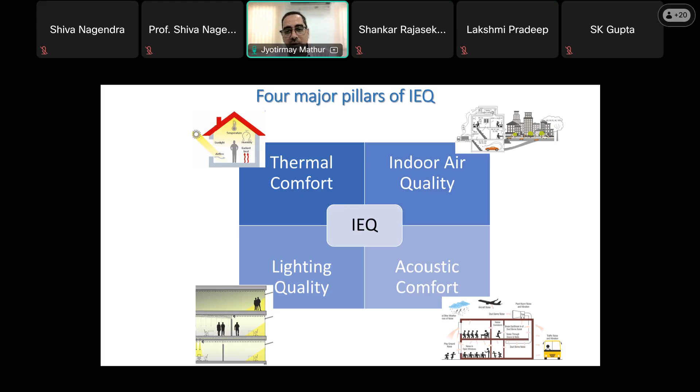So coming to the indoor environment as it is seen as of now, there are four major sections of indoor environment. One, of course, is indoor air quality, which most of you are familiar with and you work day in, day out in this space. But the other three are thermal comfort. We all are familiar with it. We'll see in due course how familiar we are. Then we have lighting, also making a very important part of our indoor environment. Acoustics is also making a very important part of it.

Why these are important, and where the control on these comes from: one is of course the external conditions. External temperature affects the thermal part, external air pollution impacts the air quality part, outdoor noise gives the acoustic part, daylight impacts illumination, and green environment nowadays is becoming quite popular. People take various initiatives to make a building green. Well, the definition of green is changing from scenario to scenario, but yes, there is some impact of that.

Then we have the building envelope impacting the indoor environment, which means typically the construction material. Some of them directly impact the air quality, especially when it comes to release of VOCs and other things. You are familiar with that. Construction practices play a very important role, because if you have leaky windows or a gap between the sill and the window frame, you have not only hot air coming through that, but also pollutants coming through that. You also have facilitation of noise coming in through that, and interiors, of course.

We have building services, where the HVAC system is basically the air conditioning system in simple words, which is supposed to cover many things, but unfortunately, in most cases, it is covering only temperature and humidity. Ideally speaking, the air conditioning definition itself says that the responsibility of the air conditioner is also to control the air quality. But in many cases, we have seen that it is not doing so. It is also supposed to control odor, which is also part of your air quality, but air conditioning systems and their design do not care for it. So building services also have a very major role on your indoor air quality.

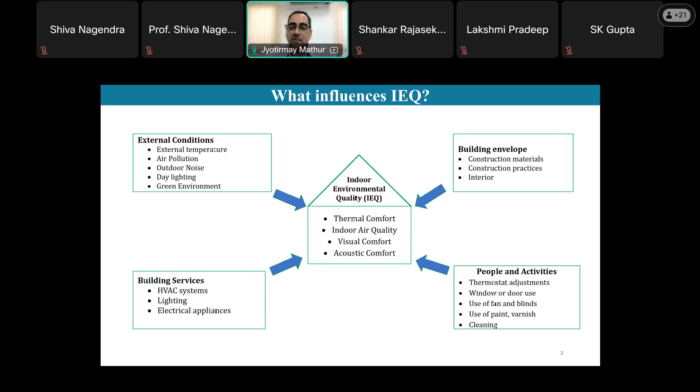So that's also controlling your indoor environment, and the building becomes stuffy, and then you have to run your air conditioner. Use of fans and blinds, use of paint, varnish, cleaning, all these things are important for controlling our environment.

So there's an organization in India, many of you may not be familiar with it, and hence I'm covering this briefly: the Indian Society for Heating, Refrigerating and Air Conditioning Engineers. They realized the importance of this field, indoor environment, and released a position paper. There was a team of about 10, 12 people working in this field, both from academia and practice. So ISHRAE brought out a position paper in 2015, and then all those who were involved sat down to develop a standard, which was released in 2016.

So this was globally the first standard, as was said in the introductory part also. This was globally the first comprehensive indoor environment quality standard, which addressed all the four sections nicely. After the release of that, there was a research project given by ISHRAE. I had the privilege of working closely with Professor Shiva Nagendra. We jointly conducted this project, and our learnings were embedded in the revision of this next version,

which was in 2019. And after that, a third version, and now we are working on the fourth version of it, in which we are discussing, can we include more parameters? For example, electromagnetic radiation. That is also becoming an essential part of our indoor environment, and so on and so forth.

So the structure of this standard is that there are three levels, A, B, and C. In C, we have kept the minimum acceptable requirements for various parameters, for example, CO2, PM2.5, and all those things, which are either legally necessary or they are the minimum requirements in the different rating systems, such as the green building rating system, and so on and so forth.

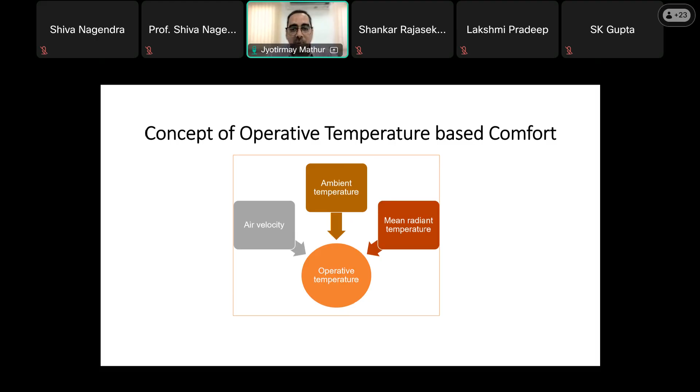Because radiative heat transfer, out of the three modes of heat transfer, is the strongest heat transfer mode. Mathematically, if you remember the equation, it is capital T raised to the power 4. So Kelvin temperature raised to the power 4, and the delta of that is much, much higher as compared to T1 minus T2, which is for conduction and convection. So MRT is to be considered, and air velocity.

Air velocity is something which, especially in India, is very important. In Western countries and European countries, people are not happy if air moves significantly. In India, we are born and brought up in a condition where we love to have a ceiling fan. We love to have an air blast on us for taking away our sweat. So we are tolerant to more air velocity. And the fact is, through many research papers, including a graph like this, which comes from an ISO standard, we validated this for India also.

And we found that, for example, in this graph, you can see there is an intercept of a velocity of 0.8 meters per second on the y-axis to the x-axis, which is at 3 degrees centigrade, which means if at whatever temperature I am comfortable, let's say 25 degrees, I am comfortable with at still air condition. If I increase the air movement in my surrounding and make it 0.8 meter per second, I will be comfortable at 3 degrees higher temperature than what I was earlier. Means 28 degrees. So the 28 degree ambient temperature would give me the same order of thermal comfort with 0.8 meter per second air velocity as a still air with 25 degrees centigrade would.

What it results into is, as a thumb rule, 1 degree rise in my thermostat of air conditioner gives me about 4 to 6% of energy saving. So with this kind of setting only, I'm sitting on a potential of saving about 15% energy, which is tremendous. Okay. And that is why this is not to be neglected definitely when we are talking about Indian context. And that is what is embedded in the ISHRAE IEQ standard also.

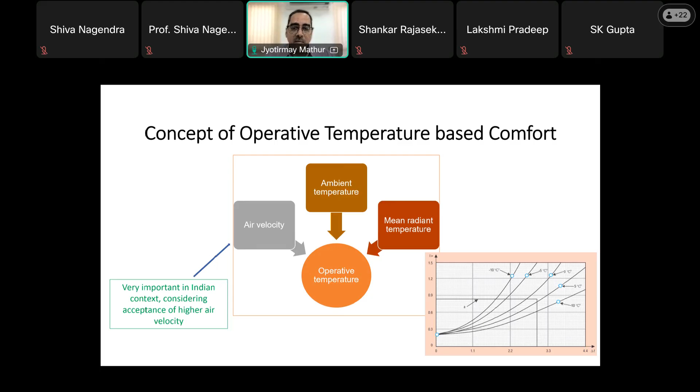So to summarize this slide, we have 3 parameters, and what they make as a combination is called operative temperature. Most of the standards world over are talking about this operative temperature, but this operative temperature becomes more or less same as ambient temperature if my air velocity is not there or not significant, and the surroundings are also at the same temperature as my air. But in Indian context, you don't like to sit close to a glass in summer because that is hot and that disturbs my mean radiant temperature. So in Indian context, we definitely need to look into these 3 parameters.

So from various researches conducted in India on Indian subjects, this is what is summarized. So the temperature conditions in summer in various offices, conference rooms, etc., should be within plus minus 2.5 of 24.5, which typically means 27, and on the lower side it's 22. So 22 and 27, it's a wide range.

And clothing, because we are adapted people. People who are there from IIT Madras, who knows better than them that you wear airy clothes which can breathe in summer because of the possibility of venting out the sweat that your body is getting. So that is what 0.5 clo is. 1 clo means a formal clothing which is not allowing much of airy kind of thing from the clothing. Okay, so the temperature band is specified, a different temperature band for winter and different temperature band for summer.

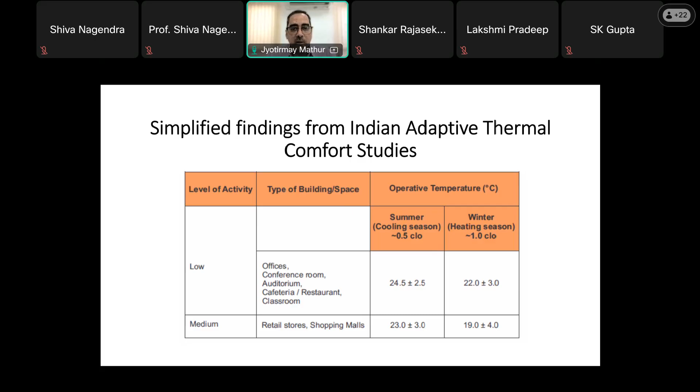But what we also need to know is my thermal comfort also is governed by many other parameters. For example, the operative temperature I talked about. So the operative temperature has to be seen from that table. Relative humidity, we normally have a notion that relative humidity 50-55% is good, but a wide range of 30 to 70% is actually good. Below 30%, of course, the air quality thing comes into, and many of us would have realized this during the COVID when guidelines were issued, that keep your air humid, because when air is humid, the particulate matter does not travel much deeper into the nasal tract, and therefore the possibility of infection getting inside. Also, it results into dryness and all other things. So humidity lower than 30% is not recommended. At the same time, humidity higher than 70% makes people quite unhappy and quite uncomfortable. And therefore, this is the range.

In addition to this, you have limits for warm ceiling, delta T between your room temperature and warm ceiling. You have cool wall, you have cool ceiling and warm ceiling. All these limits are there. Interestingly, there is also a limit on vertical temperature difference. Means at many places, your head is cool, your feet are warm, or the other way around, your feet are cool because air supply is from beneath, from the floor, and your head stays warm. So the guideline is that it should not be more than 4 degrees so as to minimize the thermal stress induced in the body.

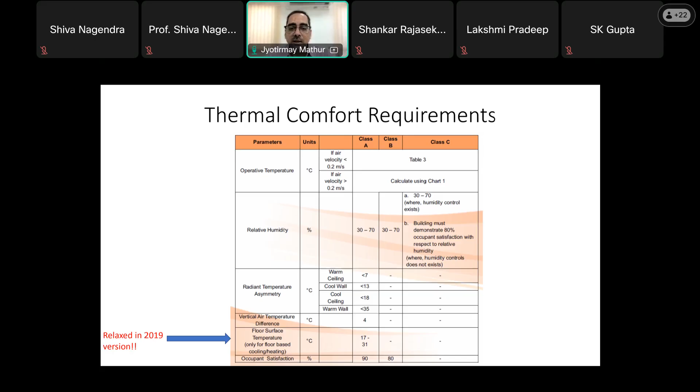Last row is also important, which says occupant satisfaction. In indoor environment, what is seen is sometimes the designers claim that they have a very good environment, but the occupants are not happy with that. So you need to have 80% occupants satisfied. You are supposed to conduct a survey on thermal comfort, and similarly a survey on air quality and acoustic and illumination also. And 80% occupants should be satisfied. Then you are called B class. 90% if they are satisfied, you are called A class.

Coming to the next section, which is air quality, and that is of utmost interest for all of you. And as I was saying, CO2 is, you can say, a pollutant, but people also say often that it's a surrogate pollutant. By sensing the amount of CO2, we sense what is the extent of ventilation. You may not be measuring each of the other parameters, but if you are measuring CO2, you at least get a feeling of how good or bad the ventilation is. So ambient is also always taken as a reference of that.

So PM 2.5, we have 25 as requirement for C and B class both. So in some of the parameters, we do not have a variation between C and B. Some of the parameters are not there in C. So the philosophy was that because C is the minimum requirement, it should not be very cumbersome. Neither should it be very complicated and costly to monitor all those parameters. But all those essential things should be covered. And that's why PM 2.5, PM10, CO, CO2, and TVOC.

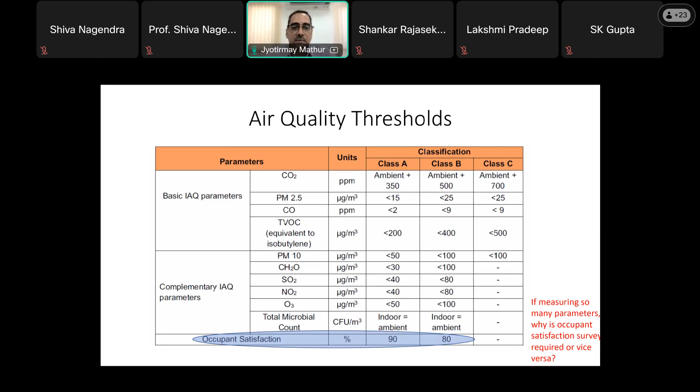These are written. If TVOC is higher than the prescribed limit, then a further elaboration of TVOC is required. And that is what is mentioned in this. Because if the threshold is 500 and I am having 600 or 700, then definitely there is something wrong and I should get into the granularity of it. Each TVOC is not as harmful, and therefore I should really go and check if the harmful VOC, not TVOC, is there beyond threshold limit or not. And every VOC has a different threshold limit. So in fact, Dr. Shankar Rajasekaran was very instrumental in developing these tables, and we heavily bank on him in the next version also.

Well, for visual comfort, again, we normally have a perception that lux level is required. For example, if I have to check illumination on my table is good or bad, I would bring a lux meter, which is lumens per square meter. I measure the lux. If it is between 300 to 500, I'll say it is good. But what the standard says is lux level alone is not important. It brings the concept of quality of light. The 6 boxes that you see on the top left-hand side are same illumination level, means same lux level, but a different color of light.

And you would have seen in restaurants, in hotels and all other places that they like to use a typical shade of light. Why so? Our body responds to different colors of light in a different manner. There is a secretion of different hormones and other things in our body as per the conditions of light. And that is why early in the morning, when the color of light is yellow, we feel very energetic. And as we move towards the night, the preferred color of light changes to pink and so on. So this is in very short the concept of EML, which is called equivalent melanopic lux. So lux is not sufficient. It has to be multiplied with a number depending upon the color of light, which is the quality of light.

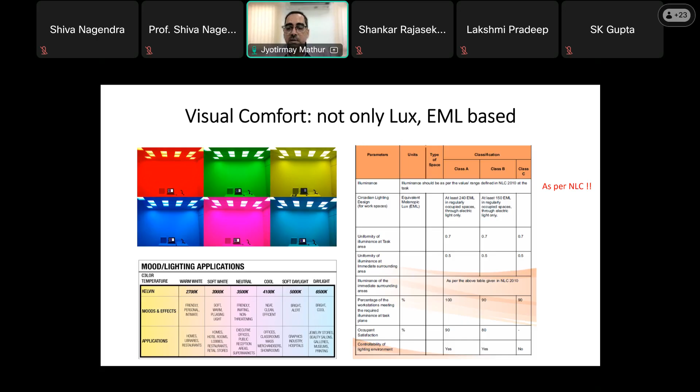Okay. And then we have, of course, the percent of workstations. So in A class buildings, 100% of the workstations should meet that requirement. In B class and C class, we have a 90% requirement. And of course, the occupant satisfaction has to be 80% and 90%.

Okay. So the fourth section, which is acoustics, and I'll quickly cover this because I have to cover the findings also. Approach to the acoustic comfort section. So in the acoustic comfort section, there are three things. One is the noise level limits, because if you have a noisy background, typically created by either the air conditioner or other devices, or there is a humming sound coming from lights, that should be under limit. Reverberation time: your surroundings have a property of absorbing noise, and that is to be under control. Otherwise, you get an echo and other things.

And third is the speech transmission index. Speech transmission index is something which quantifies deterioration in the quality of sound when in the same room I am speaking and you are listening. What quality of the sound signals I released are reaching you. That is what is the speech transmission index. And in some cases, we have seen that it's difficult to listen to people very clearly. And that is because of the speech transmission index of that surrounding.

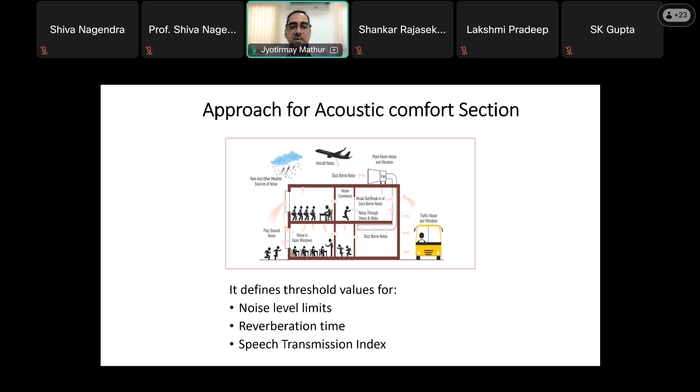So quickly, there is an elaborate table which specifies different kinds of places, because in each type of place you would have a different threshold limit or permissible limit for speech distortion or allowable background noise. For example, if you are in a classroom, you would not like to have a significant speech loss, and therefore a high speech transmission index would be required. The background noise should also be very low, and therefore the noise criteria value would also be low. So that is the fourth pillar of indoor environment quality. And if you have done really well in all four pillars, you have good indoor environment quality.

Nowadays, globally, there are efforts, and we are also trying to have the same in the next version of the ISHRAE IEQ standard: how can we have a comprehensive indicator merging all four sections? And there are many schools of thought. One is to have a weighted average of all four parameters. And within each section, you have, suppose, 5 parameters. Depending upon the health risk posed by any particular pollutant, you assign a different weightage to that. But saying is easy; it's very difficult to assign a weightage scientifically to these things. And that is the challenge taken up by many research groups the world over. And I would be happy if any or many of you present right now take this up as well.

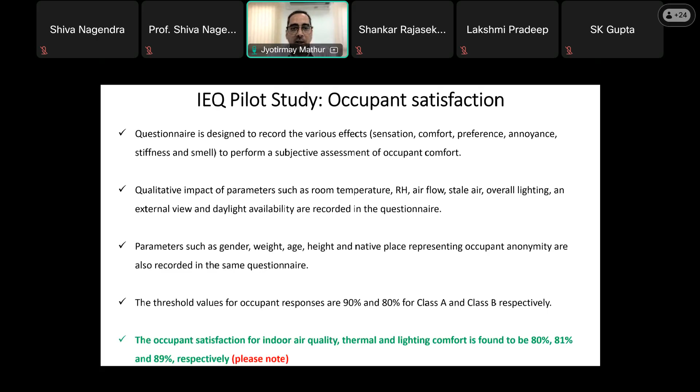So a challenge with us was, in the first version of the project, are the levels achievable? We developed the standard using literature, but are these achievable? Has anybody tried achieving these in the field? So what we did was we conducted a lot of pilot studies in many buildings in Jaipur, and Professor Shiva Nagendra conducted studies for many buildings in Chennai. And what we found was that this is what was happening in Jaipur.

And that is where my duty is to caution anybody who gets into the occupant satisfaction survey, whether it is for air quality or any other thing. The conclusion is we cannot 100% rely on the occupant satisfaction. It has to be substantiated with the measurement. That is what our finding was.

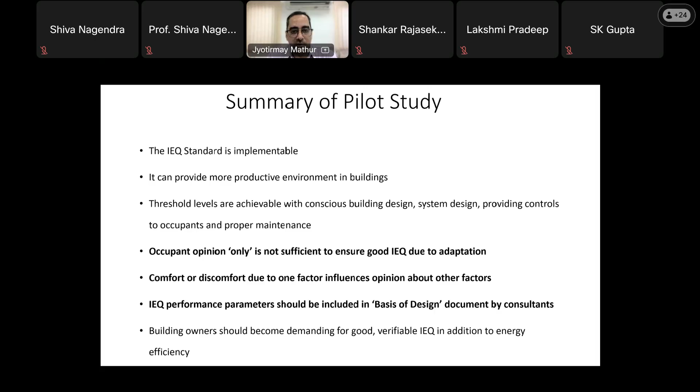And sometimes people complained later on when we went deeper into the investigation and another questionnaire, people realized that yes, because the ventilation was poor, it is also causing some discomfort to us, and they opined that they are not comfortable. So there is a correlation between the temperature and perception about CO2. And that is what is also to be investigated deeper.

So we are talking about indoor environment quality, whether we are talking about one pillar of that or all the four pillars of that. Why is it important? The hypothesis is that because of indoor environment quality, our wellness is improved. And when our wellness is improved, our productivity is also improved. Whether we are a student, whether we are an office person, or any other place. So this is the hypothesis.

So we actually tried to challenge this hypothesis: is it really what is happening? Has somebody tried to cross-check, or is it just a hypothesis and we accept that hypothesis? Well, interestingly, I came across one paper from Harvard Business Review, and that has become my motivation for taking this further, which says that there are many anti-productivity factors in a building.

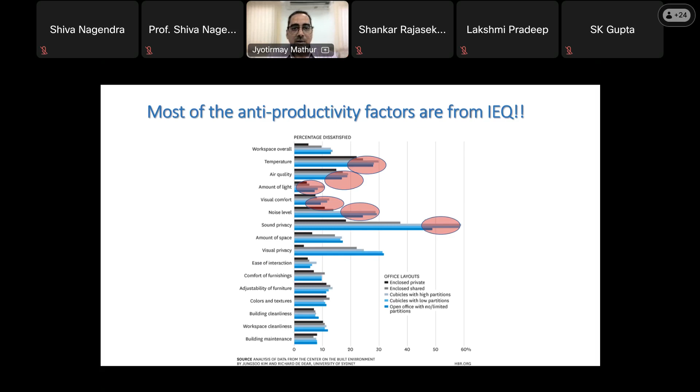Sound privacy is, of course, the highest. Temperature, air, and noise there. And light, productivity is least affected by light because of the adaptiveness of eye, as I said. But in the long run, that is also not a good thing. So getting motivated by this, we really went deeper into this.

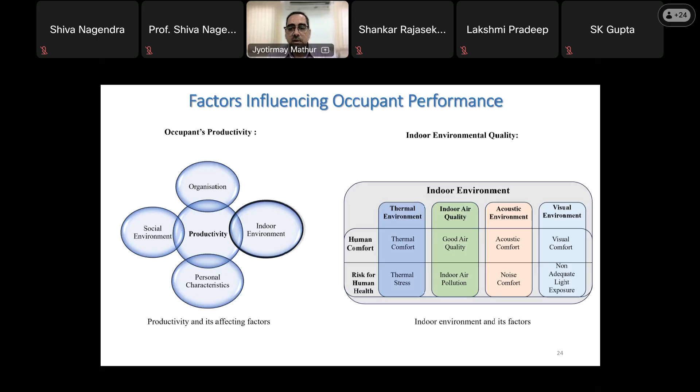So productivity of a person, first of all, what we found, is a function of organizational culture, a function of the social environment a person is from, and personal characteristics. Somebody is very productive, somebody may not be that productive. And of course, indoor environment. So that is what was coming out from literature. I'll move further on that.

So we specifically analyzed the impact of thermal environment on cognitive function and the productivity of people, occupant performance. I expect some of you to take up this challenge and investigate what happens to the occupant performance with respect to indoor air quality, especially CO2. In fact, one of the students with me is working on the impact of CO2 because ventilation is also a challenge. And we spend significant amount of energy for having high ventilation.

If you have higher ventilation rate, the heat ingress in your building is also high and there is an energy penalty. So what is the correlation? What is the optimal? That is what is to be seen. So we have air temperature, relative humidity, airspeed, radiant temperature, controlling my thermal environment. As I said, clothing insulation and metabolic activity are your personal attributes. So that is personal choice. But there are 4 basic things which are to be looked into.

One is the attention, the span of attention, how deep is the attention, and so on and so forth. Memory is also a cognitive function which affects my performance. So short-term memory, long-term memory, free recall, verbal memory, all those things are there. Perception, how is my perception? There are 4 kinds of perceptions. And then we have high order skills. So some reasoning functions, some planning functions, some problem solving, and all these things.

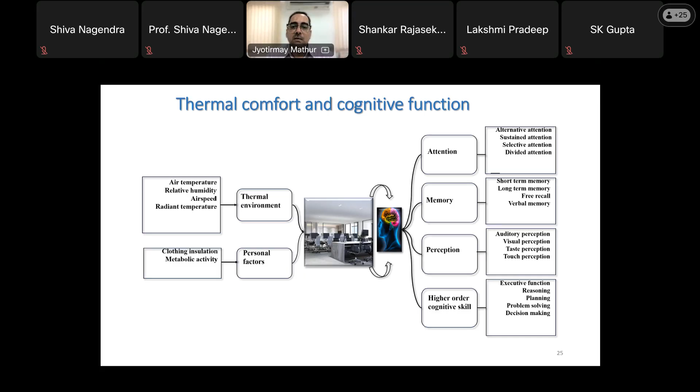And there are certain tests. So there are international protocols for conducting these analysis, and there are questionnaires. So what we did was we had in different settings, this is just one example. We conducted these in classrooms also, we conducted these in office settings also, research labs also, and we found that, so this is the glimpse of the variety of conditions that we had during this analysis. So all those tests, a series of tests actually, I'll come to that slide, was conducted.

So there were subjects in winter, we had 96 subjects. Summer, we had 48 subjects. You can say that this number of subjects is less, but I'll tell you later why it is so difficult. Even this number is, as I'm saying, till this research was conducted, this number was world's highest. Most of the papers that we were finding had 20, 25, 30, at max 40 subjects.

Okay, so we had air temperature ranging from 15 to 24 in winter, 24 to 33 in summer. In winters, definitely air velocity doesn't make sense, but in summers, we varied the air velocity from 0.2 to 1.2 meters per second, which is the agreeable limit normally. After that, the draft makes you uncomfortable. So the total number of samples we collected was 384 and 576.

And we conducted tests on thermal sensation, thermal comfort, mood disturbance, willingness, well-being, and all that. So there is a series of neurobehavioral tests which are accepted internationally. And some of these tests are also conducted for astronauts who are sent by NASA and other similar organizations. So we actually found those protocols and conducted those tests. This is how the test is conducted.

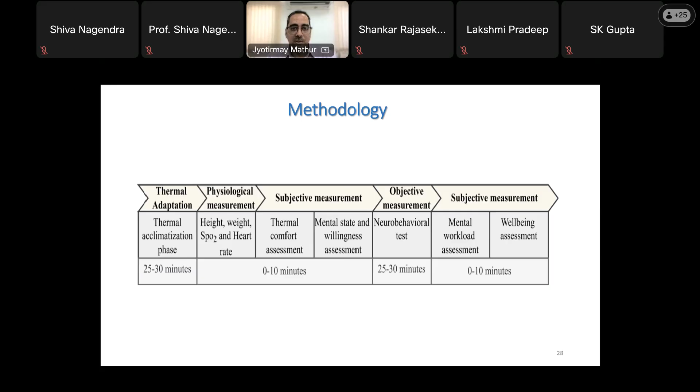And that is why I come back to the fact that in most of the publications, you would find that such tests are conducted on 15, 20, 30, 40 at max subjects, because even we needed to spend a lot of money for keeping them motivated. And we needed to ensure that they don't memorize the test, and so on and so forth.

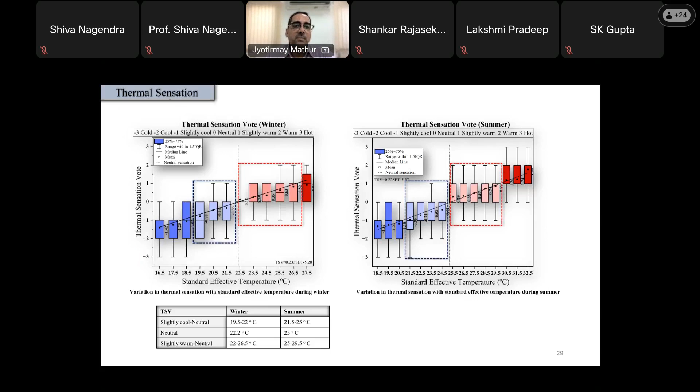So this is about thermal sensation. Thermal sensation, obviously, in winters, we had relatively lower temperature at which they were comfortable, summers a little higher temperature at which they were comfortable. But interesting is that in thermal comfort, winters, we also expect that they would be really fine at a slightly cool environment, but it was not so.

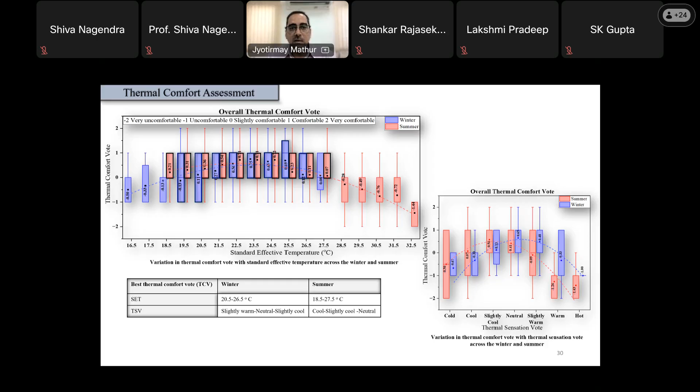You can see the graph at the bottom and the curve which is there. It is peaking at a higher temperature as compared to the peaking of summer temperature. Means people like to be in a slightly chilly environment in summer and slightly warm environment in winters, against the normal notion that we will be okay at a lower temperature. This is what we found.

More interestingly, this is also what was our finding, that the mood state is also a function of temperature. So in the mood state, what we found was that in summer, the mood disturbance was minimum when the setting was slightly cool or neutral. When they were feeling slightly warm, the mood disturbance started increasing. When they were feeling slightly cold or cool, the mood disturbance also started increasing.

Reverse was the situation in winters. When they were feeling slightly warm or neutral, the mood disturbance was decreasing. In fact, with slightly warm condition, the mood disturbance was minimal. What it indicates is, unlike the hypothesis of thermal comfort, they always tend to recommend that when people are neutral, keep that temperature setting.

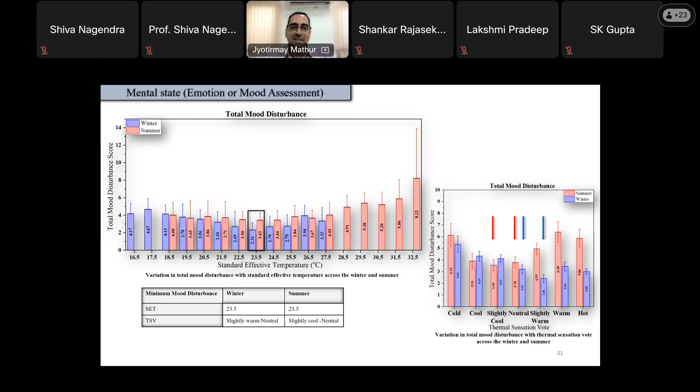But what our mood disturbance study says is that when they are feeling slightly warm in winter, keep that temperature setting. When they are feeling slightly cold in summer, keep that temperature setting. And that is what was against the prevailing hypothesis.

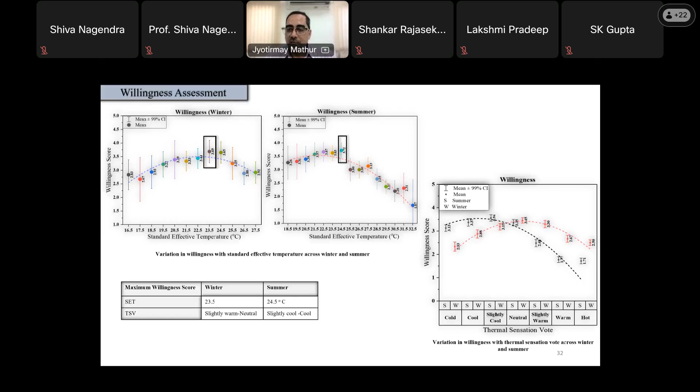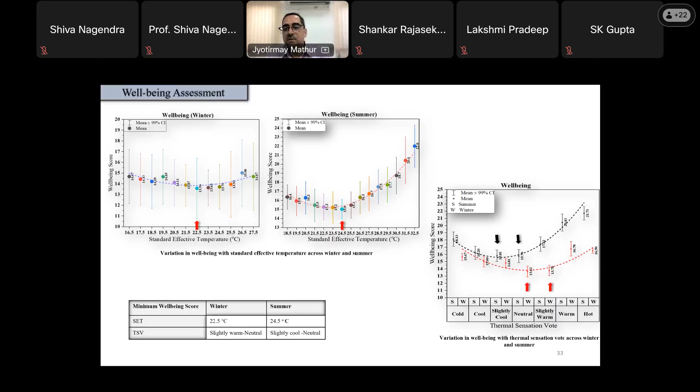Well-being, there are a lot of checks for well-being, for example, dryness, giddiness, eyes burning, and all those things. And again, the well-being assessment was also revealing similar situations in summer and in winter. In summer, you can see that again, the same thing, the well-being was better if the person was slightly cool or neutral. In winters, the wellness was better if the person was neutral or slightly warm.

So we also had, out of the quantitative assessment, the assessment of overall performance of persons. And that is what is important. We expect our students to perform well. We expect our researchers to perform well. So what kind of temperature settings would make them work best?

Because if you remember in JEE, one question right or wrong makes it or breaks it. Okay, so therefore there is a lot of impact, even your grades change. For those who are students, your grades change by 3 marks or 5 marks, whatever be the scene. And therefore, what we found again was that the performance of all these students and officials was also high when the environment was neutral to slightly cold in summer and neutral to slightly warm in winter.

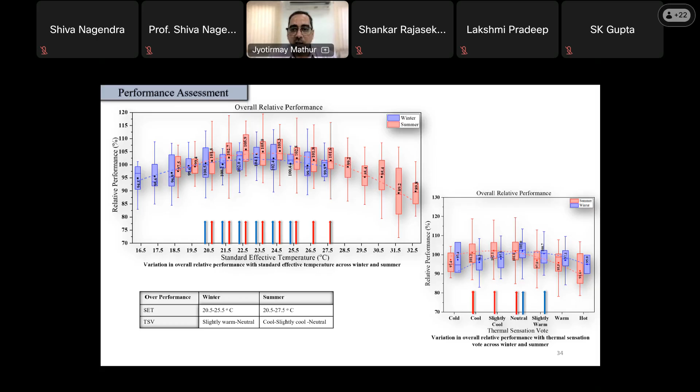Then the order of reduction in performance, you can see on the larger graph that the order of reduction was as high as 10%. Of course, the bandwidth was high, but on an average, over a temperature difference of 3 degrees from a very preferred temperature towards the non-acceptable limits, the performance decreased by 10%. And that is only because of temperature conditions, mind it. We have other parameters also that would affect your productivity, typically the lighting, the air quality, sound, and all.

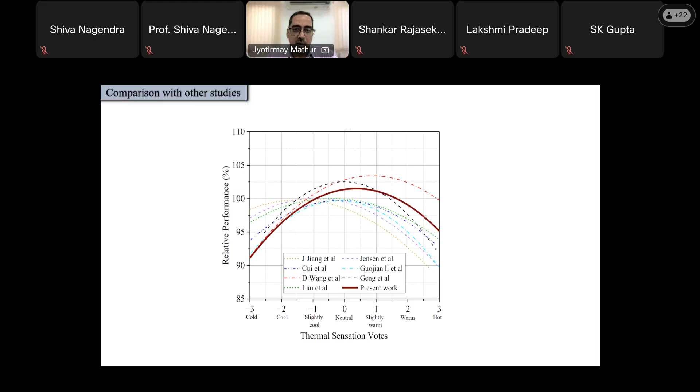So we just cross-checked how our findings were with international studies, and we found that the trends are pretty much similar in other studies. But more importantly, what I want to sensitize you about, maybe towards the end of my talk today, 10% is the productivity loss that we have seen in the graph, and that is only because of temperature and humidity, of course. If I combine the productivity loss due to lighting, due to bad air, improper ventilation, and acoustic disturbance, background noise, and illumination, this will be much higher than 10%.

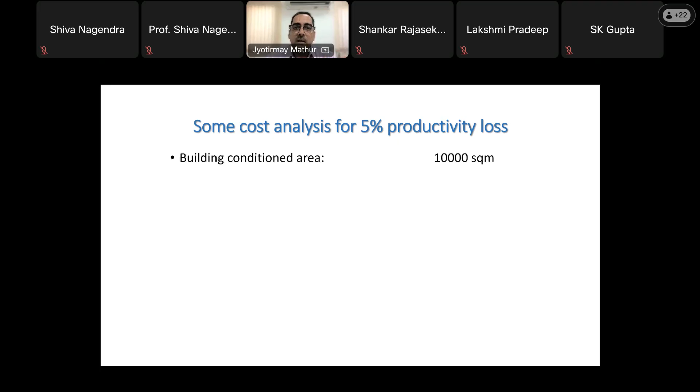I am taking a very conservative 5% productivity loss, and let us evaluate how much it is. Suppose I take an air-conditioned building of 10,000 square meters, which is typically 1 lakh square feet. A construction cost of 3,000 per square foot gives me a cost of 30 crores for this building. EPI is the energy performance index. Energy performance index is the electricity units you consume per square meter per year in any building. And 100, let me tell you, from the Bureau of Energy Efficiency benchmarks, is an efficient building. So this is an efficient building.

The cost of energy, if I take 10 rupees per unit, the electricity bill it pays is 1 crore per year. This is about the energy. The cost of electricity over the lifetime of a building, 40 years life, is 40 crores. If I take about 10 square meters per person, which typically is there in many IT offices, maybe even less area, I would house about 1,000 persons in this building.

Every person on an average getting 10 lakh rupees per year as a salary, my salary bill is 100 crores in a year. So the cost of energy is nothing as compared to the salary bill. The salary bill is much higher as compared to the cost of energy. And the building cost also is much lower as compared to my annual salary.

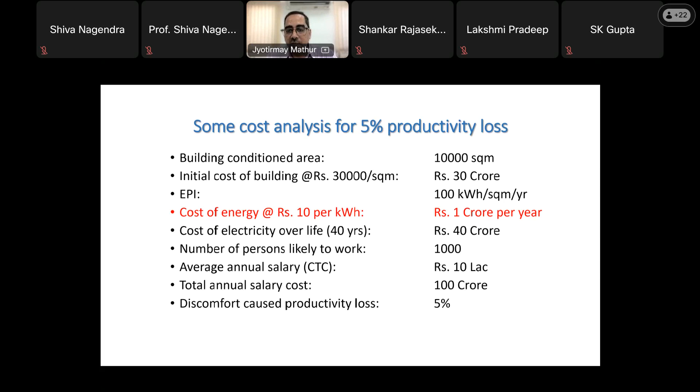Suppose we have 5% productivity loss. So my cost of poor IEQ is 5 crores. 5% productivity loss, 100 crores is worth of their productivity, which is their salary. So 5 crore per year is the cost of poor IEQ, whether it is coming, as I said, because of temperature, because of air quality, because of anything.

Why this is important, why we should sensitize building operators for this, is many times we have seen that they have removed the filter from the air handling unit. Sir, this is increasing the pressure drop and this is disturbing the energy bill. Okay, they remove it. Many times they close the fresh air vent. Sir, outdoor air is very hot. It is increasing the heat load and therefore energy consumption is increasing.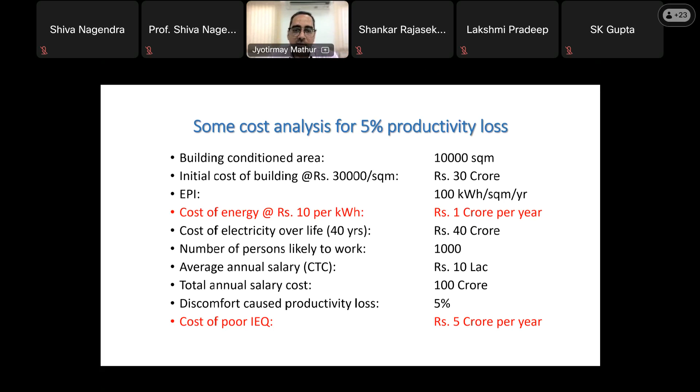What we can see here is the energy cost is 1 crore only, the total. Even if I save 10% of that, that is 10 lakhs only, as compared to the loss I have, with a very conservative estimate, of 5 crores. It is nothing. And therefore, we should definitely force them literally to ensure that there is good air quality and there is no compromise on the air quality.

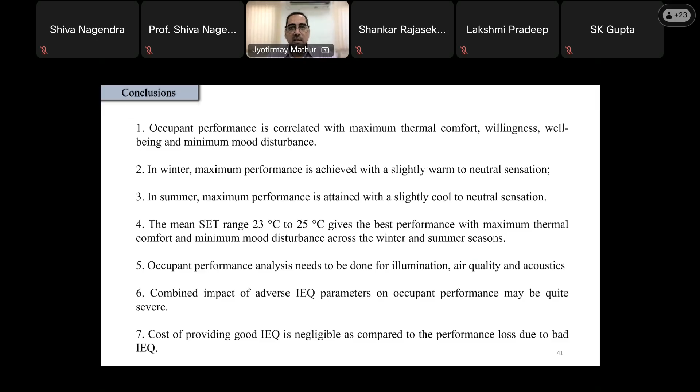I'm told that there are some questions in the chat box. Yes, yes. Sir Mathur, there are some questions. Okay, what other factor influences EML apart from luminance?

So color of light is the most important parameter. If you have the same lux level, but a blue light or a yellow light or a pink light, the EML would be different. So what you have to find out is the color of light. It is represented by CCT, correlated color temperature. On any lamp, you read the CCT value. And that CCT value through a conversion table will give you the lux level multiplied by a factor. And that is what your EML level is. So this is the interpretation of that.

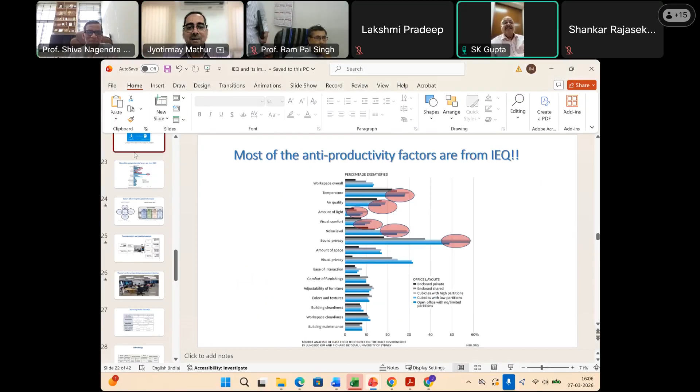Right. Second observation, not a question: like we have an AQI now, why not have a comfort quality index for indoor environments? Yeah, that is what we are trying to have. So we should have CQI, which comprises VOC, PM 2.5. Badly needed. If we have that, people will be less confused, and they will say whether this environment is comfortable or not comfortable to me, or healthy or not healthy.

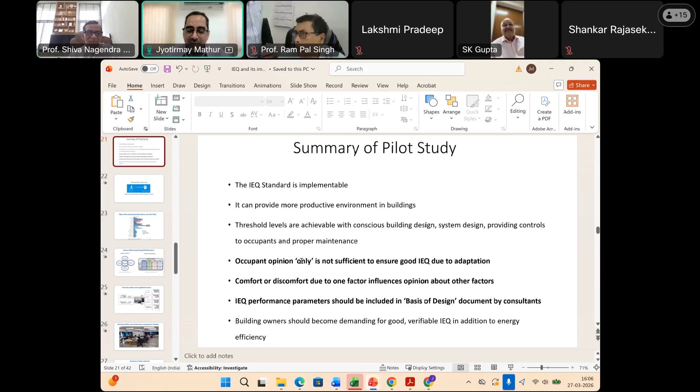Can you see my screen? Yes, I can. So bullet number 4 is: occupant opinion only is not sufficient. That is the conclusion. I'm not saying occupant opinion is not good. Okay, I missed that word only. Sorry. Fine. Thank you.